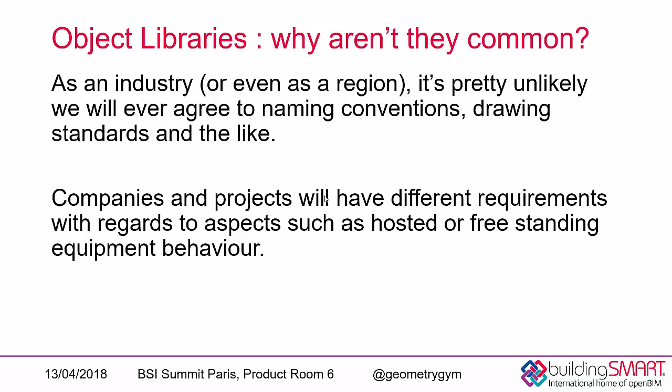As an industry or even as a region, it's pretty unlikely we'll ever agree to naming conventions. So the ability for end users to configure this as the content is created can help encourage adoption and use of this. And companies and projects will have different requirements, such as aspects like hosted or freestanding equipment behavior.

I was supporting an object library project in the Netherlands a couple of years ago, which is effectively what I'm going to demonstrate in a second. And there was a proof of concept that we did in terms of collating a database of object definitions. They were stored with reference to a standard such as ETIM, defining what the dimensions are and the attributes or the performance of the objects in question.

And where I particularly got involved was then, well, how do you convert from a database into model authoring software such as Revit? There is an emphasis on Revit in this presentation, but certainly other authoring applications are involved in reviewing this, and this presentation or work has been discussed with other authoring software applications subsequently. The intention is that the object definition is not just for design and authoring, but for fabrication, procurement, installation, and then operations and management, etc., downstream from there.

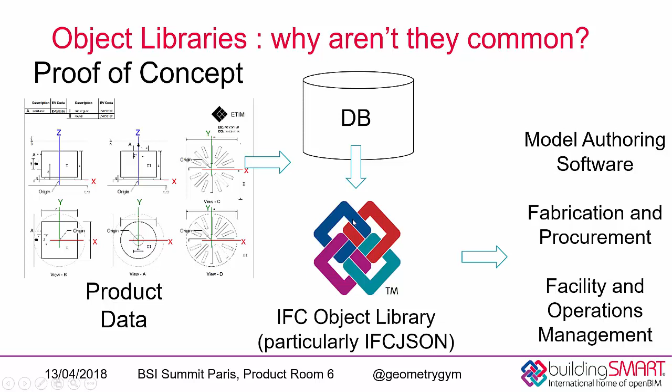So particularly then, in this case, we got invested and tested and researched how we could use IFC, or Industry Foundation Classes, to define this object library. Because the back end was all done in JavaScript, they particularly wanted to format the data model in a JSON expression, but this same proof of concept works with STEP or XML.

And particularly the role that I helped undertake was then how to define the object from a database into an IFC object library, including intelligence. So often object library or manufacturers can provide content in, say, a proprietary format and then an IFC format, although typically then that's been a coordination static object, whereas what we wanted to demonstrate, as I'll show in a second, is how you can create parametric content.

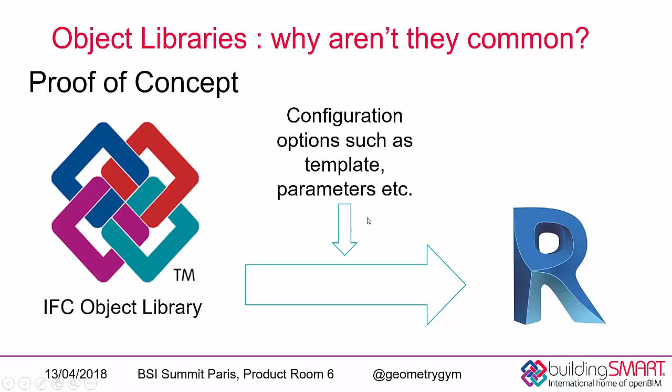And so my role was particularly then, or the tools that I've been developing, is how do you take an IFC intelligent definition and convert that into an intelligent proprietary object definition such as RFA, and then as part of that process allow the user to configure some of the inputs such as naming or shared parameters and template or some of these other sorts of inputs.

The proof of concept was primarily mechanical and services equipment. And we did about 7 or 8 different objects such as air terminals, pumps, light fittings, heaters, and that type of thing, testing a few characteristics and attributes of this during the process.

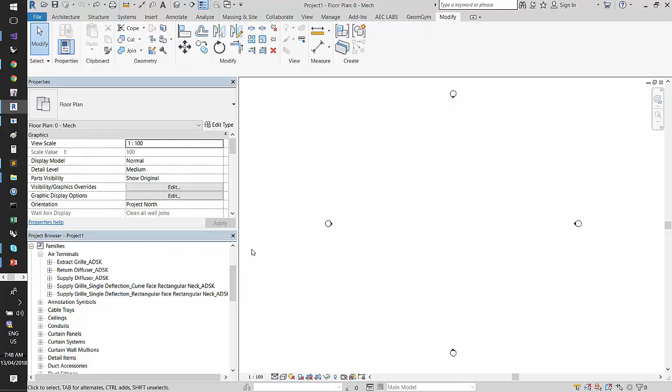So the proof of concept work there actually was a web front end to this, which could be loaded in a Revit plugin that would allow a user to browse through the database to filter out the role of the equipment they needed, such as the air terminal, to set configuration such as the language, and to search or filter based on characteristics or requirements that might be needed on that equipment.

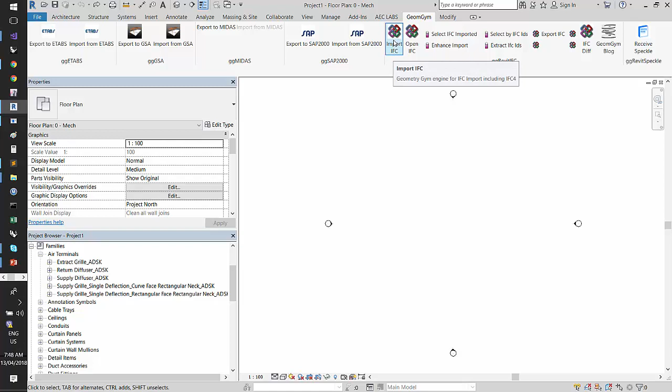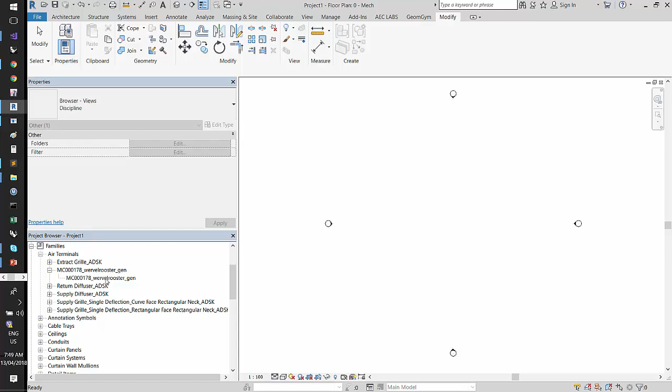That website's no longer live, so I'm just going to effectively assume I've gone to that website, selected the air terminal that I desire, and then that air terminal has been downloaded onto my computer as an IFC file. For this particular demonstration, I'm just going to click on my Import IFC button, pick that IFC file, and then what you'll see is that the plugin is opening a Revit template, building effectively from that instruction set the Revit family content, and then loading that into the project so that now exists as a piece of equipment that I can then start populating and using here in the project.

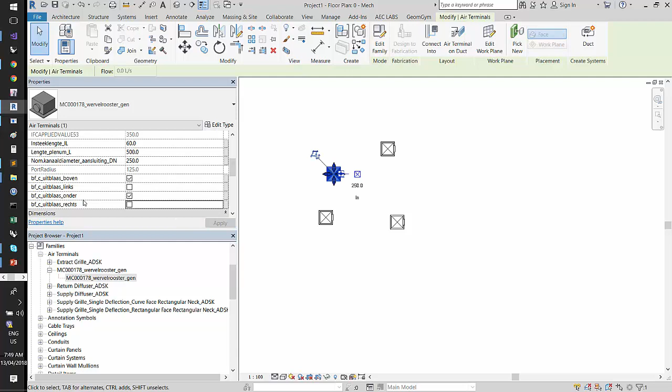So I'm going to place a couple of instances of this air terminal object, and part of this was showing that it's not just a dumb static object. IFC does have different geometric representation contexts such as 3D model view or annotations. So if I start changing some of the annotation parameters which existed as IFC properties in the IFC definition, and the concepts are very similar in IFC and Revit in all of these sort of things I'm demonstrating here, you'll see that the annotation representation of this object gets updated on the changing of those inputs.

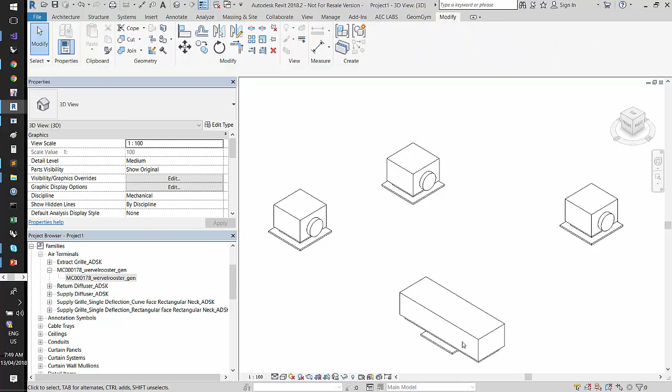There's also some length constraints and things like that applied where I can flex and change the content. As part of this, IFC has a similar concept that Revit does for systems and ports, connecting air terminals to ducts or other equipment to piping, etc. So there is a connector port here from a distribution port in IFC, and then I can actually change the diameter of that connector port and have that update and flex as part of this object.

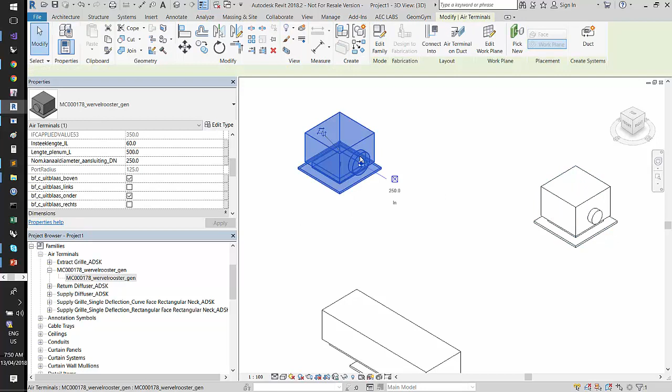If I quickly showed you the family object that it created, you would see that some of the constraints are applied here, and IFC even can have the equivalent to a calculated value in the Revit content, so it can do basic arithmetic operations such as multiplication, division, subtraction, etc., which then can correlate into the function or formula definition of that calculated value in Revit.

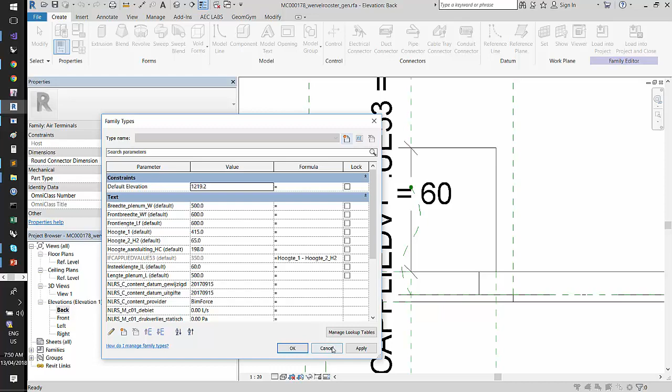So I'm certainly not proposing that IFC is perfect for common object libraries, but it is capable of a decent level of sophistication, and we can improve it. But the first thing to improve it is to identify what it's already capable of and test and provoke that.